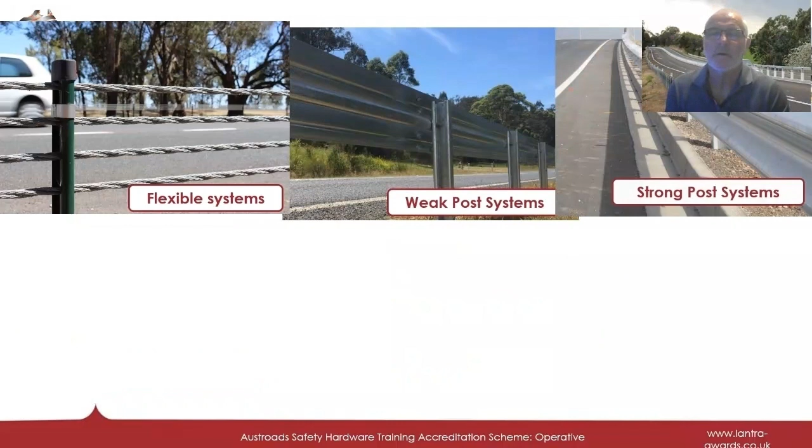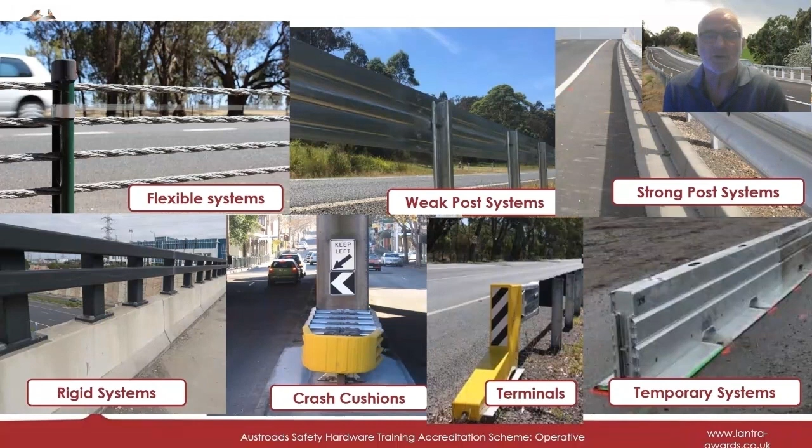The types of barriers we'll be looking at are all types: flexible systems, weak post systems, strong post systems, rigid systems. We also look at crash cushions, terminals, and also temporary systems.

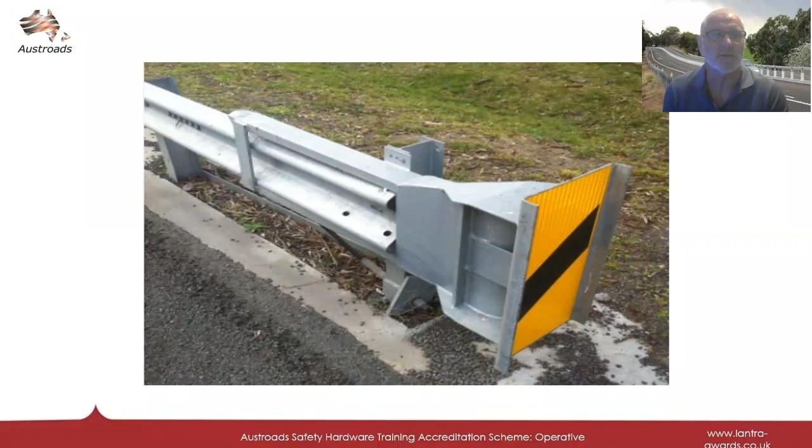Looking at this photo, can you see what the main issue is with this approach / leading terminal? If this is struck head on, this terminal is designed for the extruder head to travel horizontally along the guardrail beams, flattening the W profile of the beam and extruding the flattened section away from the traffic face. It is this action that absorbs the kinetic energy of the impacting vehicle.

Unfortunately, this assembly has not been installed correctly, and therefore it is the approach terminal. If it was struck head on by an oncoming vehicle, the W beam could spear into the vehicle rather than being extruded away from the face of the traffic. It is these types of incorrect barrier installations that we do not want out on our road network.

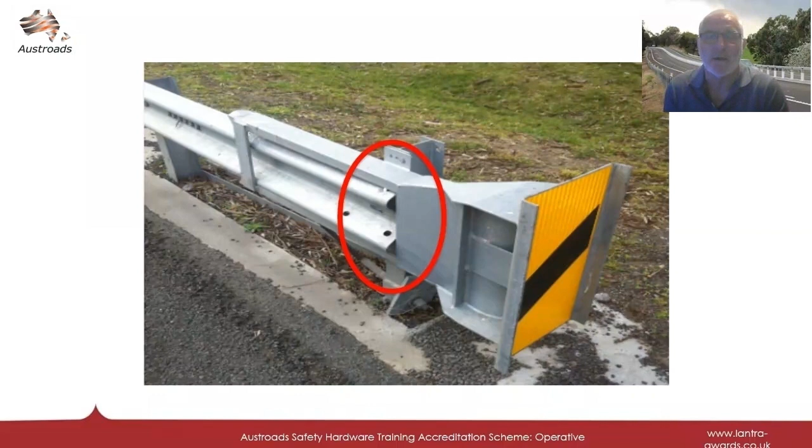Module 1, Overview. We'll look at Austroads and Lantra, who are Austroads, who are Lantra, and an explanation of the partnership between Austroads and Lantra. We'll look at the statement of purpose, why this training program has been initiated, the purpose of the program, and some learning outcomes. What can the candidate expect from today's training?

Austroads and Lantra. Austroads is the association of the Australian and New Zealand transport agencies representing all levels of government. They provide practical and impartial advice, information, tools and services to help members deliver efficient, reliable and safe mobility to their customers. Austroads solves problems for transport agencies in Australia and New Zealand.

They have a focus on making mobility safer and more reliable for all users and our transport infrastructure sustainable and future-proof. They also provide national services that help transport agencies to operate seamlessly across state borders and bring national efficiencies to their operation.

Lantra is a provider of expert training and qualifications for the United Kingdom industry, including the road safety hardware and traffic management safety industries. It has been working closely with these initiatives for over 20 years. It is because of this expertise that Austroads have brought Lantra into the room to manage or help manage this Austroads Safety Hardware Training Accreditation Scheme.

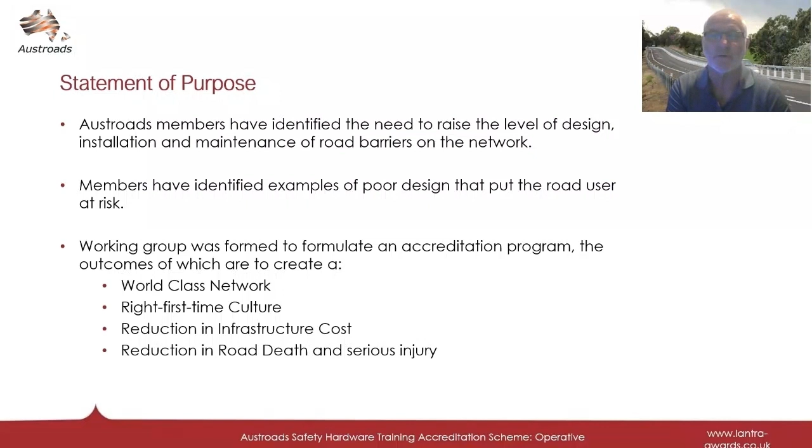Taking into consideration the learning outcomes, this today is the start of a journey between Austroads and the barrier industry. The first stage of this process is to achieve your operative status, to understand what the scheme requirements are and how you can contribute to the scheme, and also the promotion of road safety through your actions.

The learning outcomes include an understanding of the Austroads Safety Hardware Training and Accreditation Scheme, known as the ASHTAS framework, training and progression routes, history of guardrail, quality and standards, general terminology, parts of a road, installation requirements, system testing and system usage.

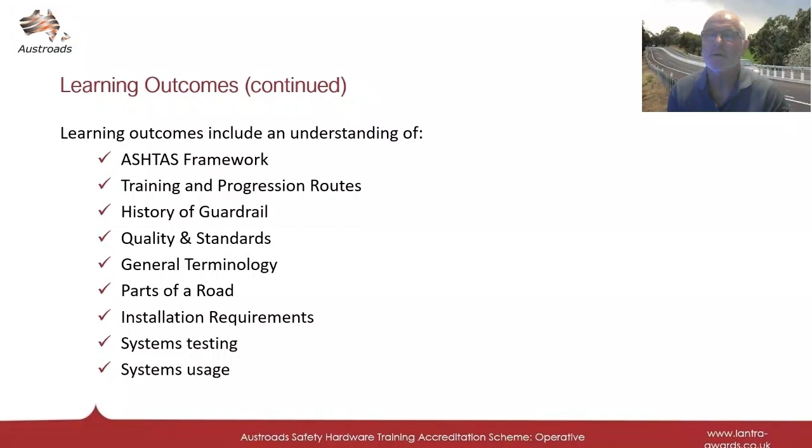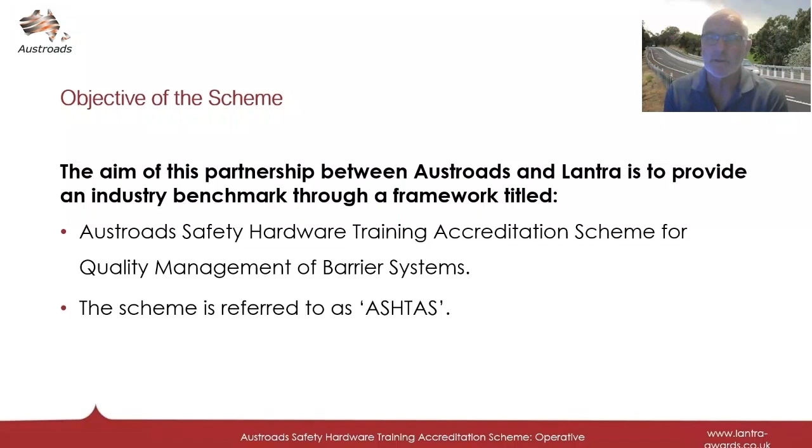Moving into Module 2, we'll look in more detail at ASHTAS, training and progression, history of road restraint systems and Austroads, and quality control, assurance and standards. So the objective of the scheme, the aim of this partnership between Austroads and Lantra, is to provide an industry benchmark through a framework titled Austroads Safety Hardware Training Accreditation Scheme for Quality Management of Barrier Systems. The scheme is referred to as ASHTAS.

Throughout this presentation, we have included summary slides. This is to recap previous information, such as what is ASHTAS? ASHTAS is the Austroads Safety Hardware Training Accreditation Scheme. ASHTAS is based on the International Quality Framework ISO 9001-2015, which has 10 key sections.

Sections 1, 2 and 3 are information for an organisation. These are scope, normative references, which are other documents that are necessary for the application of this standard, and Section 3, terms and definitions. Sections 4 to 10 are the requirements an organisation needs to meet to achieve certification. These are context of the organisation, leadership, planning, support, operation, evaluating the quality management system's performance, and improvement.

The key sections of ASHTAS for operatives and installers are sections 7, 8, 9 and 10 of ISO 9001-2015. These are support, operations, performance and evaluation, and improvement. The support looks at resources, including plant and equipment, records, training records, and other requirements that will support an operative and installer to provide a quality product.

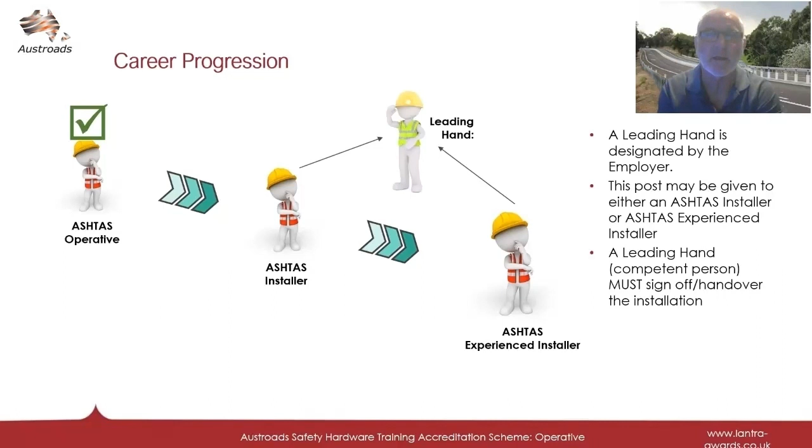Currently, jurisdictions are having the suppliers sign off on the install. This is a way forward to ensure we get a quality outcome, that now this sign off, the certificate of compliance, will be signed off by the installer. So therefore, if there are two installers on the same pay scale, one is to be nominated as leading hand to ensure that you have that ownership of signing off.

So the training framework and competency path, if you like to say, is you have the prerequisite training, which is your construction induction card, or your construct safe card. Moving into the operative, then from the operative training, you'll move into the installer training. Installer training will be a system that you are trained in each system that you are installing, whether it be a domain product or a proprietary product. This will depend on the install training you undertake.

As part of this install process or installer process, you are to maintain a logbook. It will be an e-logbook, and you are to record the evidence of an installation you have undertaken or completed. As with most industries training, there is an expectation that you will renew your training every 36 months.

Before you start work on site, do you have up-to-date safe systems of work? Have these been briefed to each employee? Has each employee signed off on those safe systems of work? Do you have the current site drawings? Do they have clear instructions? Is everybody briefed on these instructions?

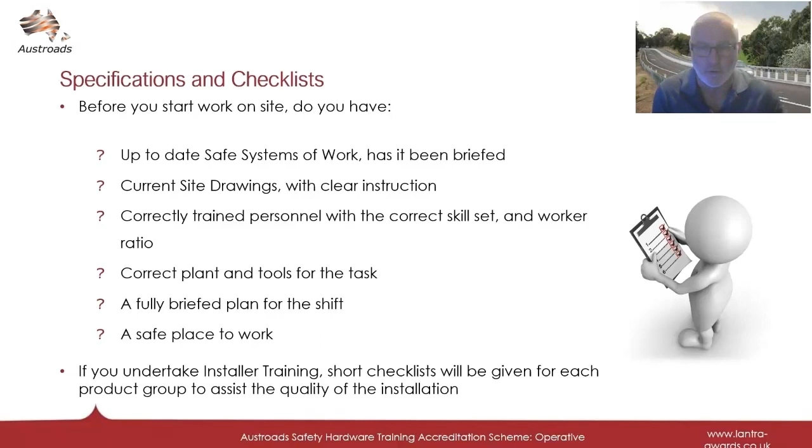Do you have the correctly trained personnel with the correct skill set and worker ratio? Do you have the correct plant and the tools to complete the task? Do you have a fully briefed plan for the shift? Do you have a safe place to work? Have all risks and hazards been mitigated? And if you undertake installer training, there will be short checklists given for each product group to assist with the quality of the installation.

Looking at the training outline, a record of the training will be available via a smart app. It will be unique to you, so that will be available once you have completed this training session. The training will require a refresher every 36 months. A record of your experience will be via that virtual logbook that we spoke about. There will be some verification of the work. This could be via observation or interview.

And the loss of ASHTAS installer and ASHTAS experienced installer status could occur if you fail to maintain your training and/or demonstrate repeated poor quality of an installation. In summary, specification and checklists. The crew plan forms the daily briefing for the works being undertaken and will include any specific quality requirements. Training, refresher training will be required to be undertaken every 36 months. This is to maintain product knowledge and good practice.

Crew size and composition. Under this framework, lone working is not permitted. The minimum crew size is 2. Of those 2, at least one must be an installer, and one of those must be nominated as the leading hand. The maximum crew size is 8. The maximum installer to operative ratio is 1 installer to 3 operatives. So if you've got a crew size of 8, you must have at least 2 installers to the 6 operatives.

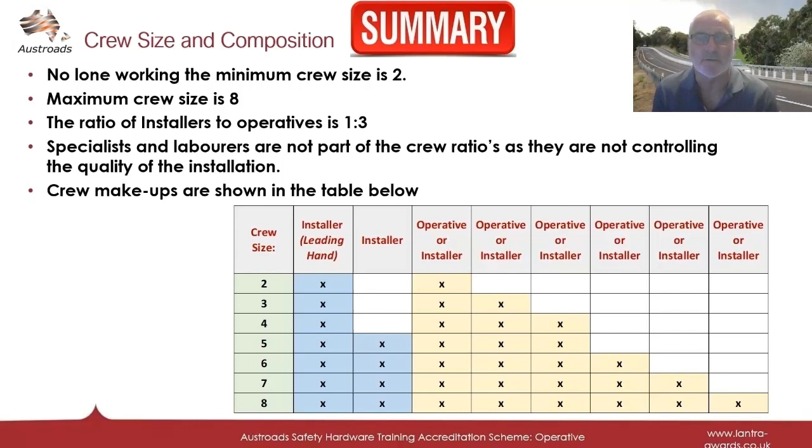Quality assurance and quality control. The Plan, Do, Check, Act (PDCA) cycle is a core element of ASHTAS under your control.

Your planning ensures you have the right skills, materials, standards, drawings, equipment, all available to you to undertake the installation, the doing. After you've done the quality install, you inspect, audit, check to ensure that the product will meet the requirements that have been specified either by the road authority or the manufacturer. Then you release, or if required, rectify if necessary.

You act. So quality assurance, QA, that's the procedure or set of procedures intended to ensure that a product or service, before work is complete as opposed to afterwards, meets the specified requirements. Quality control is a procedure or set of procedures intended to ensure that a manufactured product or performed service adheres to a defined set of quality criteria or meets the requirements of the client or customer.

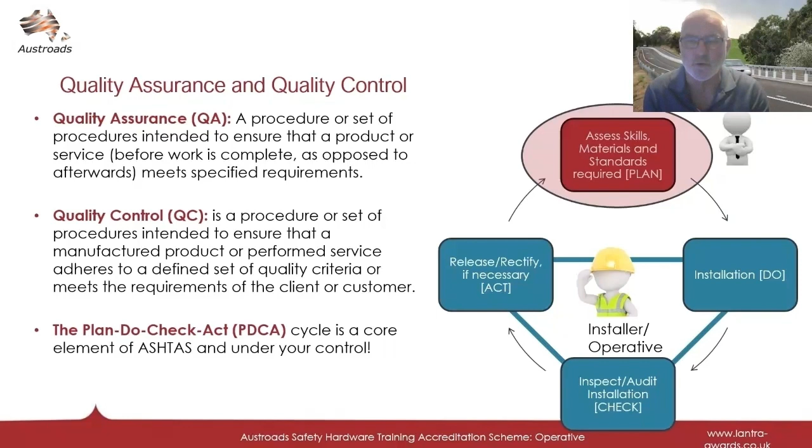So in summary, quality assurance is how you will do it. The quality control is you doing it to ensure it meets that quality assurance outcome. And this is all done through your Plan, Do, Check, Act cycle. Total quality management and right first time.

So starting with the road authority, the road owner, they will look at a requirement to install barriers. They will obtain approved design for the works. Then from that approved works will come the installation, the installers, the operatives. They will install the product as designed, as per the manufacturer's specification, and they will supply the certificate of compliance. The road authority will verify that compliance and open the road.

This provides the safe place to travel, but from that, you'll also receive feedback from the customer, the road user, and this is the cycle that will continue to ensure we have a safer network for all to use. This model then drives right first time. This provides quality metrics: quality, cost, delivery, correct product and build, no rework, minimum time on the job, compliant materials, reduction in traffic interruptions, happy clients, good reputation, correct as-built records.

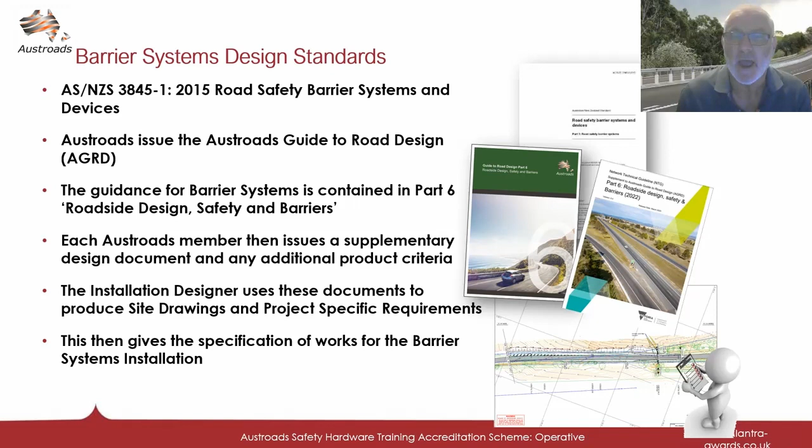Each Austroads member then issues a supplementary design document against this AGRD. This may include any additional product criteria and may also take into consideration local conditions and requirements. The designer will generate a barrier system based on these documents and may also include specific information supplied by the client.

As mentioned in the previous slide, the Austroads Guide to Road Design, Part 6, provides guidance on roadside design and in particular guidance on evaluating the risk of the roadside and the selection and use of road safety barrier systems. Part 6 provides information to enable designers to understand the principles that lead to the design of safer roads. This includes identifying hazards, undertaking a risk assessment process of roadside hazards, establishing the need for treatment of hazards and determining the most appropriate treatment.

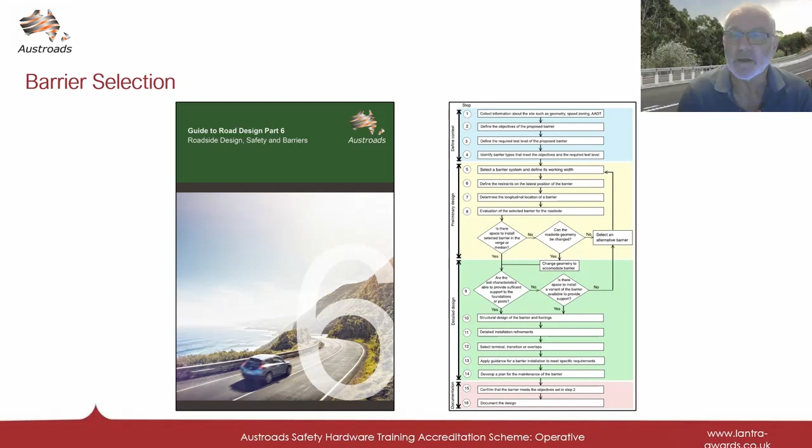This process includes a comprehensive 16-step process to select the most suitable barrier to protect a roadside hazard. So in summary for design, Part 6 of the Austroads Guide to Road Design, the AGRD, is the principal requirement for road safety hardware installation, maintenance and repair.